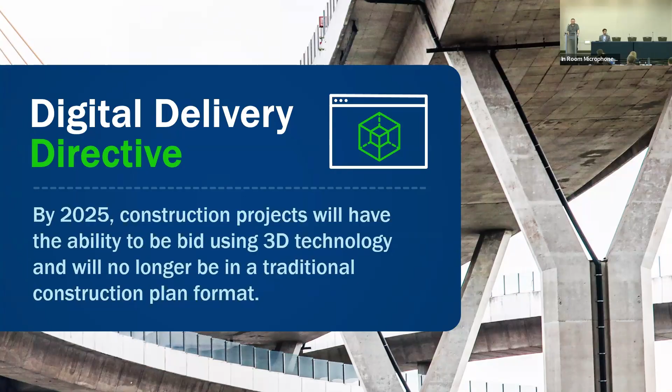So our directive, again, started out with small projects very early on. It wasn't that flip of a switch. So we tried various aspects of digital delivery, a lot of hybrid type projects.

So our first one was where we just modeled the earthwork and pavement structure, eliminating the cross sections. So it was just that introduction of digital delivery to our contractors or our inspectors. So anything they needed off of the cross sections, they had to go to the model. Everything else was still in plan, 2D paper plans.

But as we advanced, we delivered two bridge projects with complete structure models, no plan sheets whatsoever. They were still hybrid though, so on the roadway side there were still paper plans. Then we continued to advance.

The next step was drainage and utilities. So we have projects out there that added the drainage and utility aspect to digital delivery. And then each of our districts was required to have a model as the legal deliverable.

So complete model deliverable projects - we have multiples of those currently. One's advertised, a couple were going out, and we have one in construction. So we are making progress and we continue to advance along.

Now the ADCMS grant opened up, and we were one of the first round recipients of that grant. We felt the need to advance that IFC deliverable, that open data standard, going back to those original goals of the department.

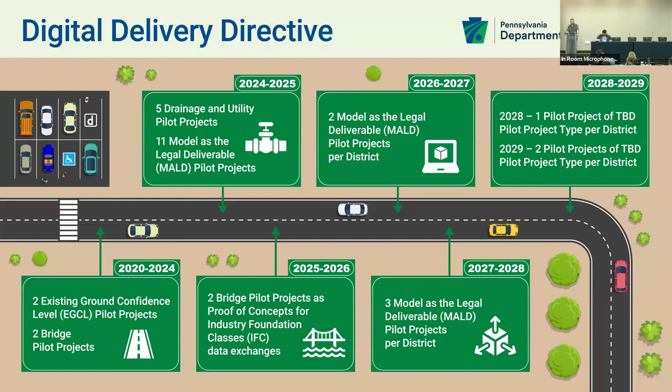So we are starting to institutionalize digital delivery as we continue on, and the open data standards is going to play a big role in that deliverable. Our ADCMS grant was really, again, to improve that data interoperability.

We tested those IFC models - one was for information only, but the other project was contractual, so the contractual documents were the IFC files. It really helps us advance those model projects. These projects are complete model deliverables, delivering that IFC file as contractual for the bridge elements on the steel structure, and for information only on the concrete structure.

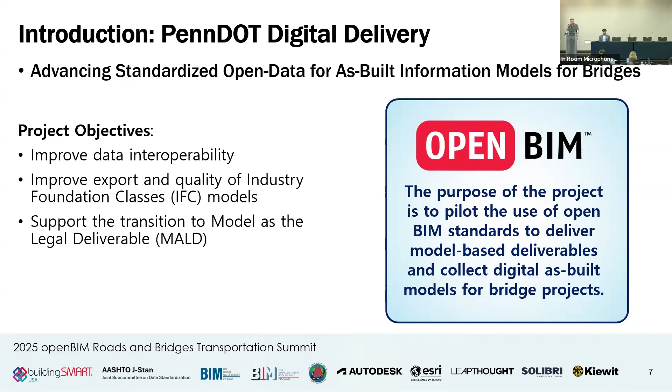But with that, I'm going to turn it over to Joe. Oh, no, I'm not - I still have two more slides.

Sorry. So why is it important that we're actually doing this? Today, we're using our proprietary software, delivering it in that file format, and then the contractor has to take that format and put it into his equipment or utilize it. He's stuck in that ecosystem, that exact product line, to really utilize it without much trouble. So what do we want to achieve?

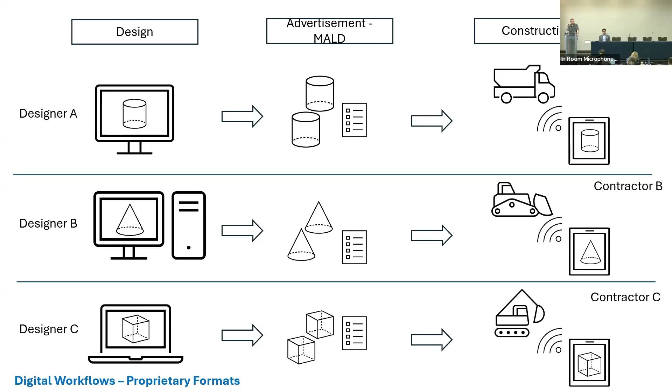We want to be able to achieve where we can design in whatever software. That's the department's goal - we do not want to dictate what software platform our consultants or our contractors have to use, because we want them to utilize what they have developed, what they have invested in and trained their staff in. We want to be open.

So as we go through, this is where we find IFC to be that interchangeable standard - we can design in whatever, provide that as an IFC, and then the contractor can take that IFC file into their equipment. There's not the manipulation like there is in a standardized proprietary file format.

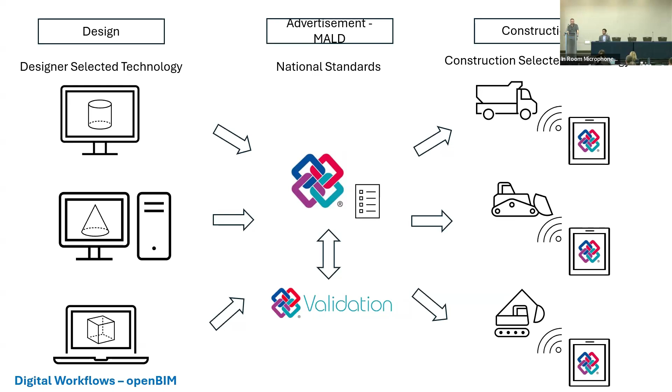So with that, I believe I turn this now over to you, Joe, to get into our pilot project. All right, thanks, Alan. And I know, between the various events that have happened here, probably everybody has heard of this project - even from the sessions yesterday it was mentioned, and you may have even seen some presentations on this before.

So we are going to go through some of the base information, the foundation of how it was built, but we're also going to get into some new updates and some additional content. So if you have seen a presentation on this project before, don't completely check out on me here.

I know we've had a string of events here with IHEEP and everything, but we do have some updates here. First, Alan mentioned the ADCMS and specifically the objectives here. To hit on a couple highlights, the first is we are looking at testing a proof of concept of what the BIM for Bridges Pooled Fund has developed - the IDM, IDS, BSDD, insert your acronym here. That was a key component of this from our perspective.

The other thing I want to mention, and it was said earlier, I think yesterday as well from Will, is just the overall collaboration with the Bridge Pooled Fund, the Iowa ADCMS team, the states, the software vendors. Without that, this could not have happened in the timeline that we had. So I want to make sure I mention that - from our perspective, that was huge in terms of delivering our goals here.

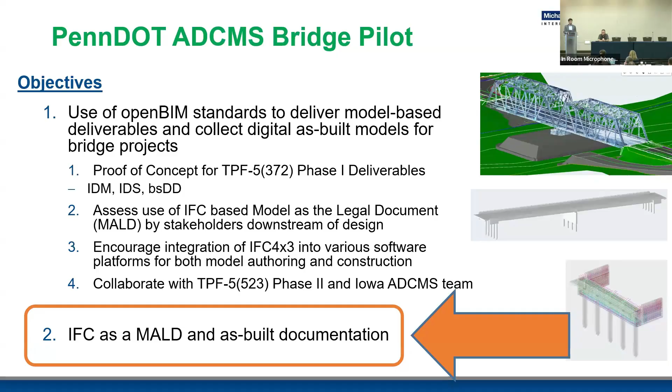Strike that from the record there. I don't know where that came from.

As Alan mentioned, this looks at not only this project but all of the ADCMS projects. They are typical workhorse projects - we're looking for that consistency, not the one-off big cable-stay type structures. Not that that's not beneficial, but we're looking for a repeatable process. I think probably every bridge owner in this building, what we're showing with these projects is these types of bridges make up the bulk of your inventory. So we want to make sure we're on that end of the spectrum.

Also, we want to build on some of what's been done already in terms of openBIM. Going back to even the first BIM pilots, Utah DOT - the first Black Rock project that Utah DOT did, six or seven years ago, we actually provided the IFC files, IFC exports for information only, even back then. That was to work with some of the contractors' software, the fabricators in particular, just to be able to do that interoperability piece. So that's been done.

You can see some examples here on the right-hand side of my screen, where even if the receiving software said it can import native files from other software, we were seeing some discrepancies there, even in the geometry in both cases. The way we solved that was with some IFC exports - the geometry comes through, but we want to build on that approach that's been used for years. Now we're getting into more of the metadata, the non-geometric information properties that are coming through, as well as the structure that we're going to go through here. So we want to build on that.

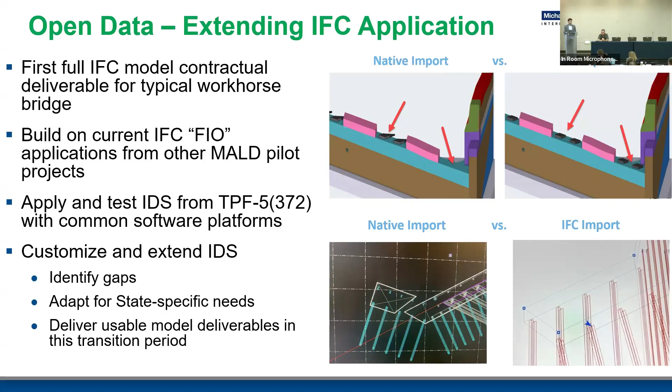I don't want to miss the point here. At the end of the day, this is a real project that we have to deliver—a bridge project that has to be built. So we need to make sure we have a usable deliverable even in this transition period where we're testing. This drove the timeline; we have deadlines we have to hit for the project. We kept it high up in our mind that even in this transition period, what we're producing has to be usable within the field and beyond. So Alan mentioned the two PennDOT projects here.

There's just some images of the actual models. The SR 3010 bridge was a pre-stressed bulb T-beam, single span. Designer was JMT, and that was the IFC for information only project. Then the SR6 project we're going to go over today, that's a 2-span steel plate girder, and Michael Baker was the lead designer there. So again, we're looking at multiple different beam types, but still within our general workhorse type project or bridge framework.

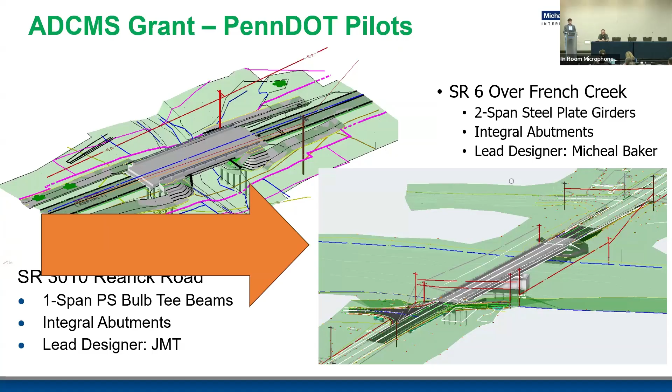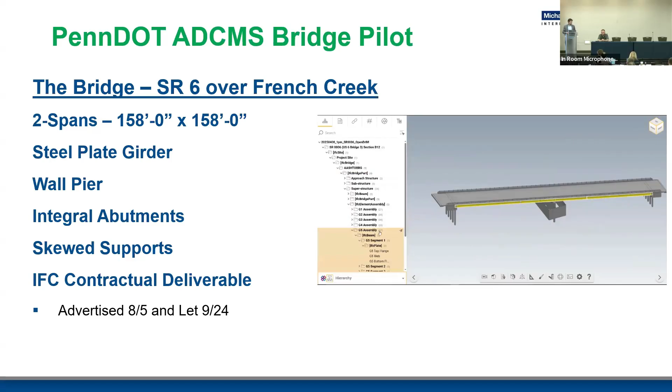Here's a little bit more detail on this particular bridge. As Alan mentioned, this has been advertised and let. As of now in September, a couple months ago, we had that let. We have a contractor on board, had a kickoff meeting, and construction is scheduled to start in the February-March timeframe—physical construction. So we're in this timeframe now where we're preparing and meeting with the contractor, just to give you a bit more information on the timeline.

So specifically on tools—I've learned from doing these presentations that all the questions seem to come in on software. So I thought I'd try to get ahead of that a little bit here. We'll get into more of the different tools we used and why and where we used them. But the point I wanted to make on this screen is that we are also providing 2D details. There are certain things that are more readily available and consumable in a 2D detail format.

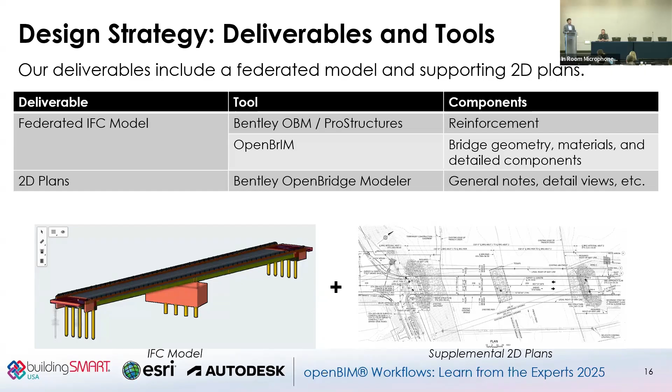We're not trying to cram 3D models down everybody's throat for everything. It's kind of like our 3D models are a hammer and everything's a nail type thing. We want to make sure we're giving information in the most usable format possible to improve and add value to the process. So there are 2D details associated with that, and they are in a digital format—they can still use the same viewers, they don't have to go to a paper PDF plan set or move to different platforms to use it. But there are specific 2D details that supplement our IFC or 3D model in general.

So this is just a brief software diagram here, a process flow if you will. We've tried several different approaches, and I'm sure Grant will get into their approach and pilot project. But what we ended up using was OpenBrIM for what I call our solids—bridge solids. That's all of our abutments, decks, barriers, anything related to the solids of the bridge. And we used Bentley Open Bridge Modeler/Pro Structures for the rebar modeling. We'll get into why we chose those specific tools. But the real key is that all of these come into the IFC deliverables—that's our deliverable for the project. We're using that to test within the IDS and the BSI validation service for use in construction and beyond.

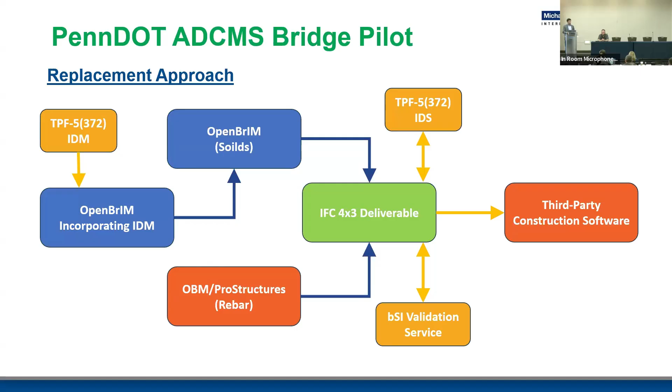So a little bit of overview specifically on the OpenBrIM software tool. As I mentioned, this is for our solids modeling. Some key features here—obviously parametric modeling, that's a key feature in any bridge modeling software nowadays. What really was important for us is they had already built in some of the IFC export capability based on the early releases of the Bridge Pooled Fund IDM and IDS. So they already had that incorporated in their software, which gave us a much better starting point. Collaboration was great, being able to get feature enhancements—the key part with OpenBrIM was their ability to turn around improvements that we needed quickly.

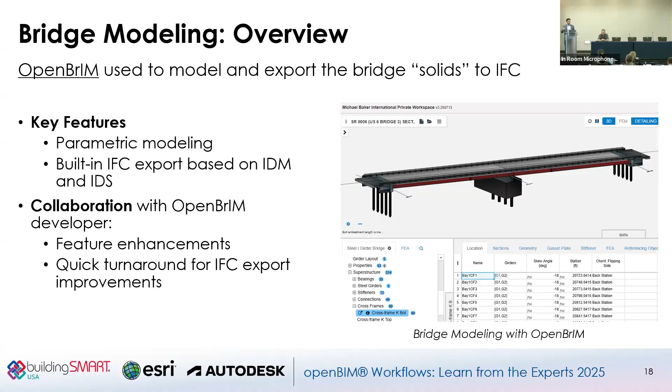I'll go over that here in the next few slides. So here's just an overview video. Hopefully that comes through.

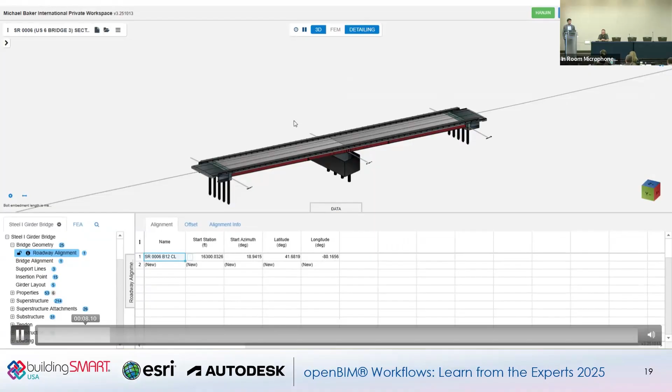This is the OpenBrIM software, our bridge within that software. Again, similar process here with parameters entering in inputs. It's kind of more of a spreadsheet layout, which as a bridge engineer, I like my spreadsheets, so there's familiarity there. But what we're pulling out here is the specific IFC tab that they had developed previously and enhanced during our project, where we got to have some key classifications that were already made and make adjustments there.

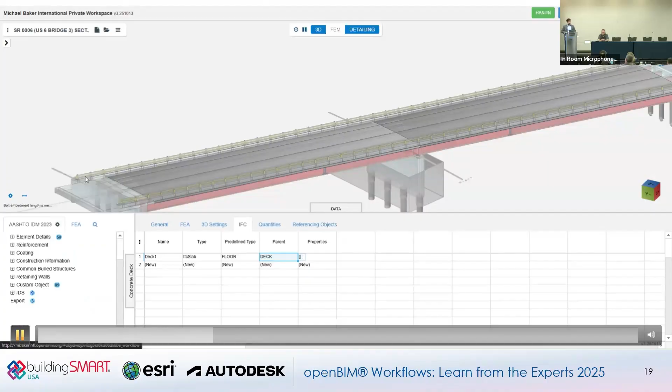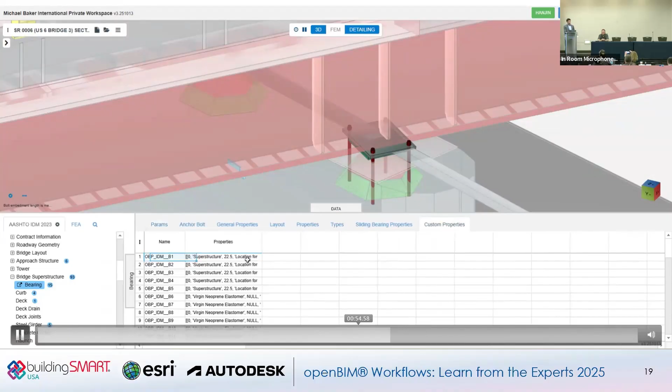In terms of how we were mapping these elements to the IDM and IDS content, it had some of the standards and built-in ways that we could very quickly bring in the IDS content that was there. So we were able to consume that format and check things right within the software before we even exported, to take a look at compliance there, as we were in the native model authoring software, as well as being able to add not only the specific content in terms of property sets from the IDM and IDS, but also custom from PennDOT, like we mentioned before.

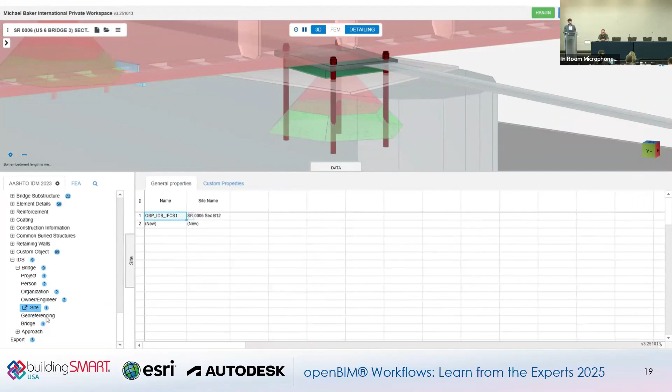So just some further observations here. Again, many may not be familiar with the OpenBrIM tool. The ability to already have incorporated this content within their software, especially the spatial hierarchy. We'll show that here in terms of being able to slide these elements in the right places, if you will, within that structure.

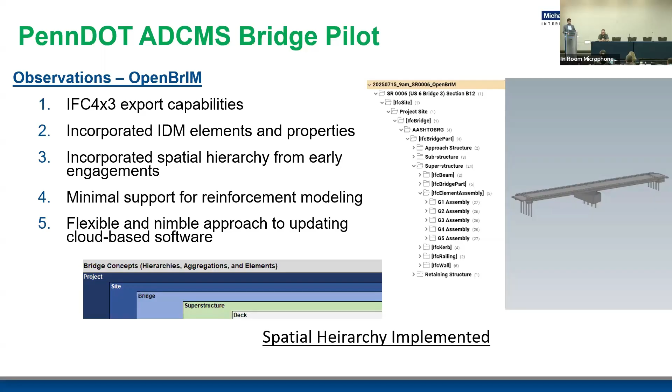They do have minimal reinforcement modeling support, so we'll get into that here in the next few slides. But the key component of them was being able to be flexible and nimble. Many times we had updates we needed from things in the morning, and by that afternoon or the next morning, we had updates pushed from their cloud-based software to make sure that we could meet our deadlines.

And that was really the key component within this, was having what we call a clean IFC 4.3 export. We all know IFC is really just a text-based file, so you can get in and manually modify that, and that can be done. But with the turnaround times that we had between checking, reviewing this content, and hitting our deadlines for the project...

We felt like we needed to have something that we could hit the button and make updates, hit the button again, and have that clean IFC export that we didn't have to take out to a third party and manipulate that text file or within a different software. So that was really key to our success in this project.

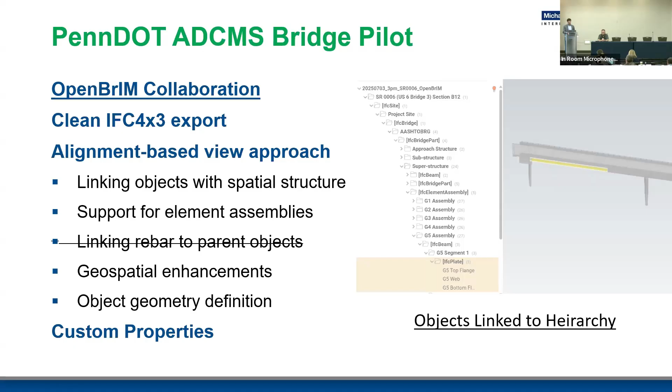And I mentioned the other ones in the previous slides. So I did mention Bentley OBM, and we use that to model and export the rebar components. Again, this was, I guess, where are my bridge people at, and who has modeled rebar before?

Couple, okay, couple in the group, okay. So, and those probably would tell you, I would think, and we'll see some head nods here maybe, but that is not something you want to do in a less mature software, right?

Rebar modeling is a tedious process, even with the best software that we have. So we wanted to make sure we had a mature software that we could model and be able to do that. And again, with OpenBrIM at this point, we wanted to make sure we had that. So we went with OBM.

The other part of that is some of the limitations we had within OBM exports to IFC for some of the bridge elements. They have incorporated rebar in the vertical construction here in IFC exports for probably decades, so rebar is rebar, right? Whether it's a bridge or a building, that content, that background, that structure for that export was already there. So we were able to get a clean IFC export specifically for the reinforcement there with them as well, to keep that going.

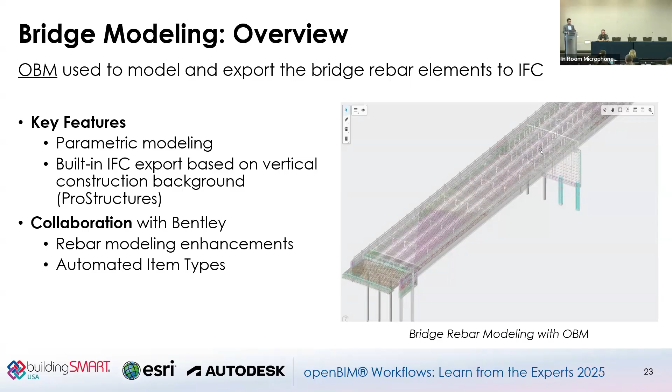So that was being able to use some of that. And again, with PennDOT's work with Bentley and previous engagements for the other BIM pilots, we had already had some rebar modeling enhancements in there to automate some of the item types, bar marks, those types of things within the software. So that's what we used there.

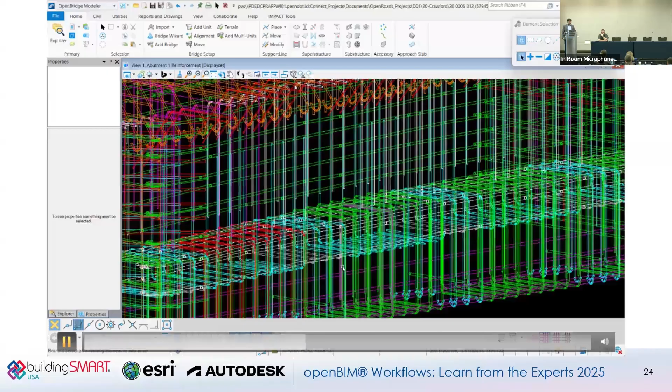So here is just a quick video of our abutment rebar modeling. You can see here, that's pretty congested, we pack a lot of rebar in there. It's amazing that they can get concrete in there sometimes you see that, but just kind of pulling in and looking at one of the specific rebar sets.

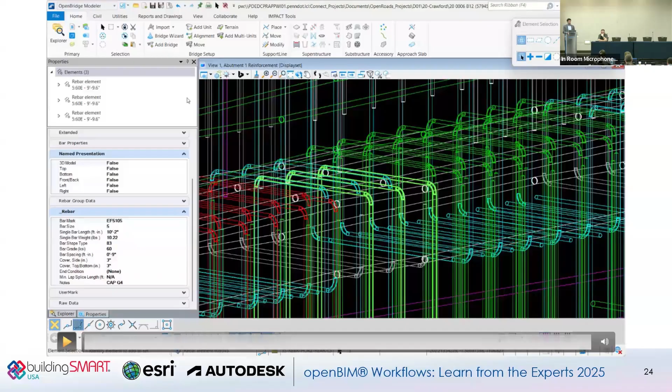Again, as I mentioned here, we have our item types already established for the PennDOT workspace. So we're able to pull that in and automate a lot of that. And then also be able to export that into the IFC file, model export, as well as some of the other ACI and other property sets that come through as well.

So a couple components here, just wanted to get into the actual IFC model structure. One of the key components is the spatial hierarchy. This has been talked about for the last couple of days, but it was key not only for the structure and matching an IDS, but where we saw this really helpful was when we got into adding property sets.

There were certain things we wanted to property set at more of an assembly level, down to a detail component. A great example is our bridge girders, steel girders. We wanted some properties associated with the entire girder line or girder group set, but also properties associated with the girder segment from field splice to field splice, and then even down to the specific plates.

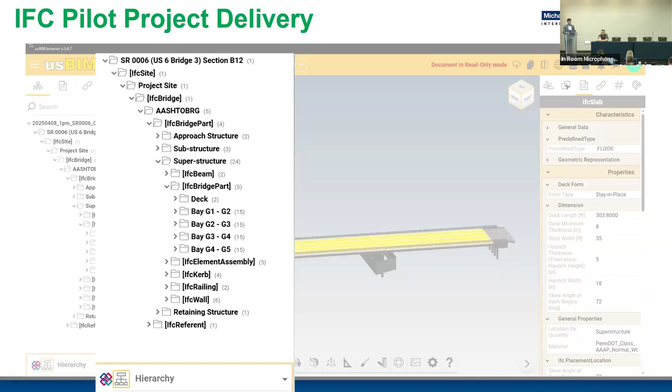Within this structure we can now add properties at those different levels, which was extremely important for us in terms of being able to check that, as well as from early feedback from the fabricator. Those properties are coming through not only our IFC specific properties, but also the custom property sets we developed and wanted to include within the project.

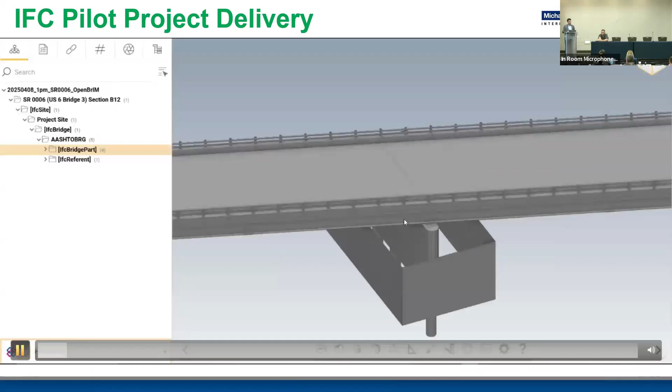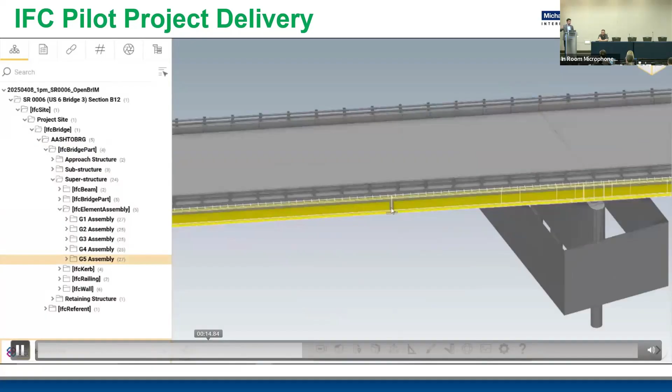Here's just a quick video showing that content, shown in a regular typical free IFC viewer. It shows again that consistent hierarchy - many software do have their own hierarchy, but now we have a way to have a consistent export and a way to get at different assemblies.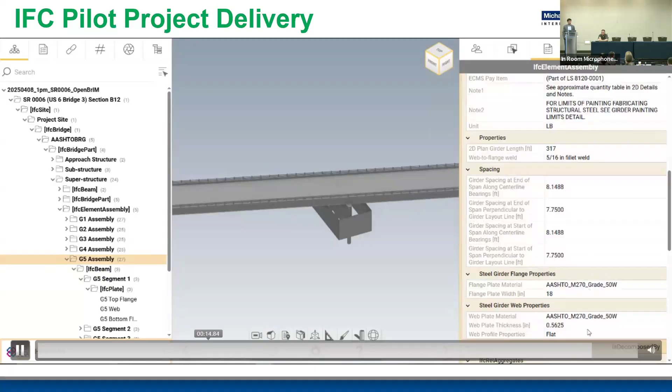There's the total girder line assembly, and now we can get down even to properties there, including some of the camber details, camber ordinates from different phases, that can be built in now to a digital file. This was something the fabricator really liked, so they don't have to get their plan set and start typing in all our camber details for the different situations.

Here's another video - this is the content with the Bridge IFC file export within the Bentley infrastructure cloud environment. This is the software PennDOT is using and providing free to the contractors at this point. It shows not only our Bridge IFC content, but also our roadway environment, approach roadway information, and utilities, all now still within that DGN format.

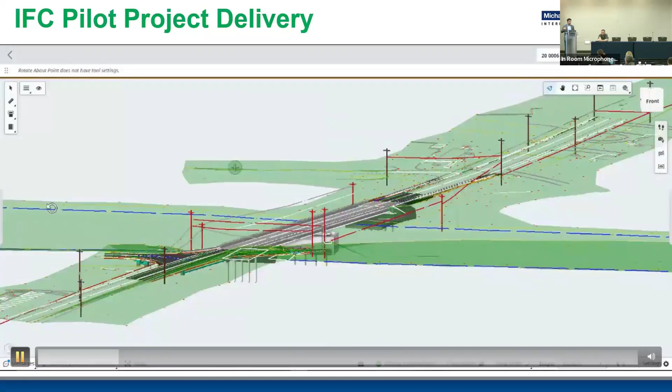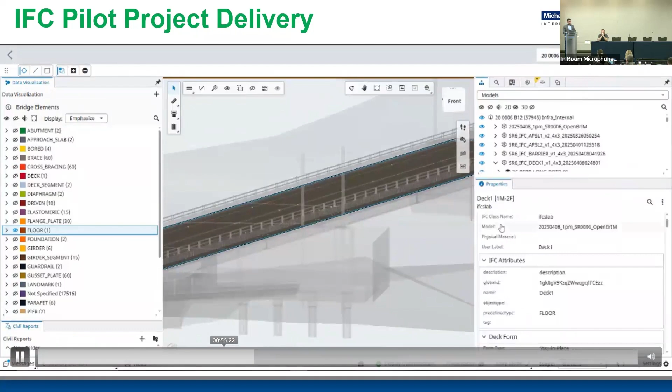So now we're really looking at federating all that information within one environment across all the different disciplines. We can still utilize viewer capability enhancements like Bentley's data visualization and filtering, and be able to isolate different components, including pay items or specific bridge elements.

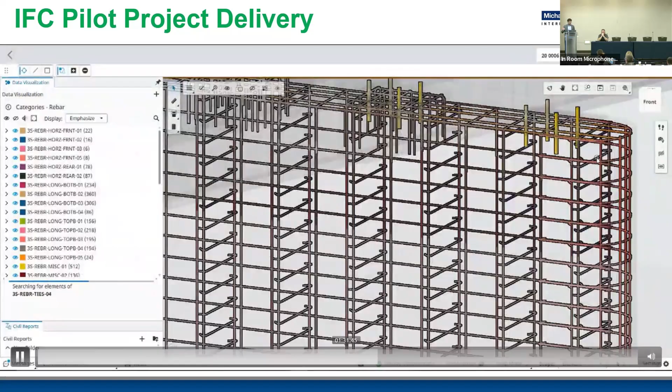Our properties are coming through now. We utilize save views, which is key - I'll get into that a little later - but now we can use that within the viewer property to create save views, which has been really big for contractors, especially those not CAD savvy who'd have to go through a CAD workspace and look at different levels. Now we can turn elements on and off within this environment and save those views so they have easy access, even in the field.

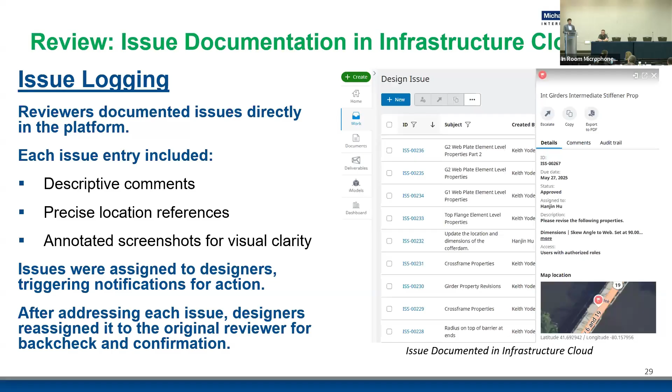So a quick few slides here on model validation and quality control. With the infrastructure cloud program, we're able to utilize issue logging with forms that's been established. So even with a new file format, we can incorporate that and still use these tools that have been established and are now maturing. That was a key component for us, especially with the turnaround times we had - being able to have that content there and utilize these tools was very important.

I mentioned the BSI validation service, getting that clean export we were able to work through - we had a few issues there. This is one of those things we went back and forth with openBIM and the software vendors and got fixed up so that we could get those clean validation reports directly from our exports.

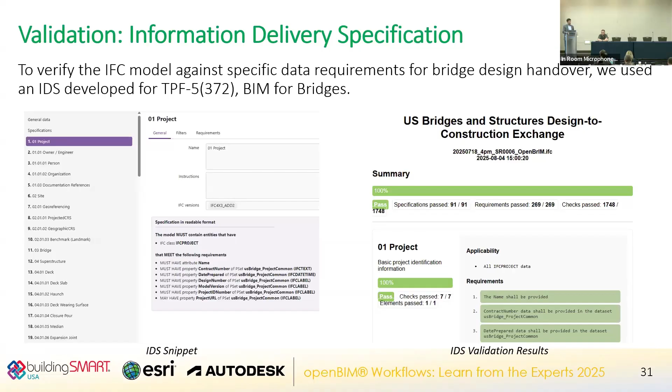IDS, same thing, be able to go through those components and make sure that our files were passing the current version of the IDS content. I know that's being updated and enhanced, but we were able to show that as far as the testing process.

So to wrap up, just a couple of benefits. As we mentioned, as a designer, we were able to use multiple tools, multiple model authoring platforms, and use what we felt was the best tool for the job. I think that's one of the main benefits from openBIM in general - the ability to use that. And again, we were able to show that even though that might not have been the intention when we started out, we were able to do that with some of the needs and test that.

Again, testing, and hopefully, as we talked and worked with Grant and the BIM Pooled Fund for Bridges, we'll be able to validate certain components and look at potential extensions of that from what's being developed there.

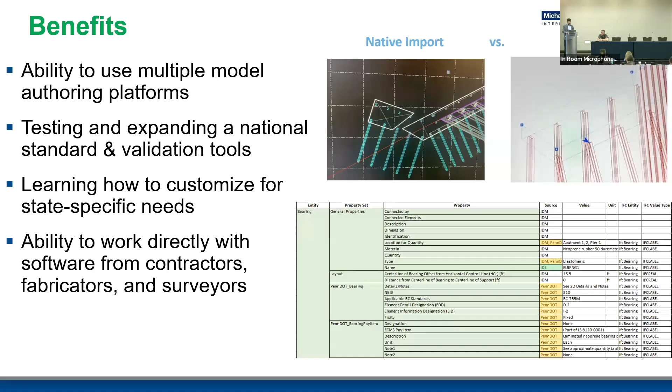Again, with the customization for state specific needs, I think that was important to go through, because every state's going to have work on top of this national standard to add some specific things that they're going to need. And with the ability to work directly with these stakeholder groups to create this project and the timeline that we had, I think that was just a huge benefit through the entire process. And PennDOT has really done a great job leading that throughout their process, not only in this particular project.

So some lessons learned, right?

We're not going to get this right the first time, and I think we already kind of knew that in the back of our head. Some of the things that we did, maybe not even the second or third time - this is going to be an evolving process, and we're going to get better. We're going to look at these different aspects. Every project's a little different. We're going to have different things that we're looking at.

But we also don't have to wait for specific tools to be developed to do this right now with this process. And we don't have to wait just in general for everything to be perfect to get things done. That's one of the things that we definitely felt like we proved through this in order to create a viable product.

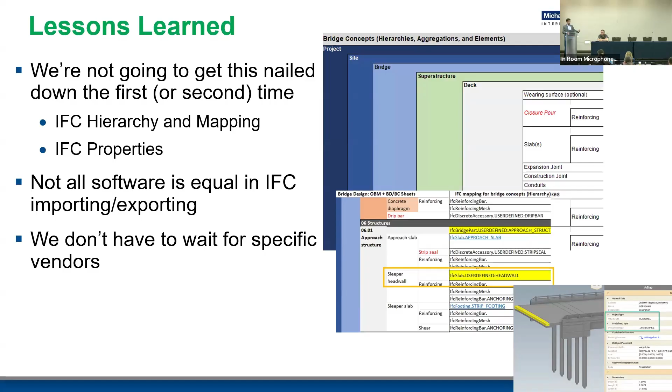One more thing I'll say is there's differences in how software imports and exports IFC files, especially when we get into these later 4.3 type versions of it. So the importance of looking at this early on and getting certain aspects and software vendors on the same page in terms of how we want these to be viewed. Because the IFC is very flexible, there's a lot of different ways you can do the same thing, so we want to get on the same page on how that's used.

So just as a wrap up here, in terms of what I'll call IFC use enhancements - I had 'IFC extensions' but I know that means a lot of different things to different people here.

Just in terms of the use - and this is more, not necessarily within the schema, but maybe again as viewers, and how we can help get on the same page - the top one that we have was the ability to have specific views. Bentley calls them saved views, and we were able to do that within the Bentley software for the files and overall process. But the ability to have that stored within an IFC file so that when contractor A or fabricator B gets this information, they're able to have those same views accessible within the IFC file, not specific to the viewer - I think that's going to be critical moving forward. I have some notes on some things that I think would be extremely helpful, but that has been a key component to being able to use this information.

Especially in the field with non-CAD users. And some other things - I know this can be done, but efficiently and effectively merge or federate different files. Especially when you start talking about contractual models, that's something I think we have to take a look at and maybe get a little bit better at, because we're not going to have that whole big federated model, at least in the meantime, where you hit a button and have everything together - there's going to be different components, different disciplines working on different aspects of that. So just effectively merging those files.

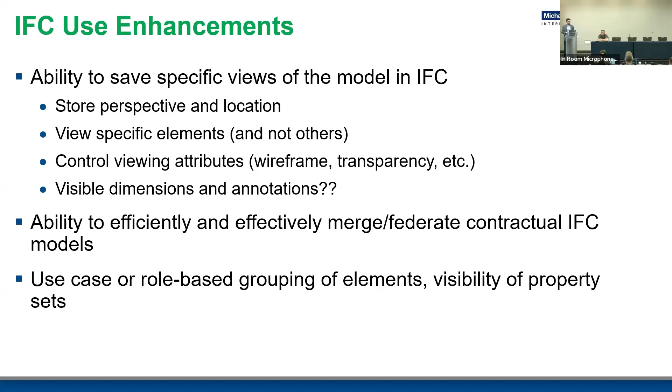And then finally, the ability to have a use case based or role based grouping of elements, hierarchies, being able to see that, and the visibility of property sets. This is one of the specific updates we just made last week talking to the fabricator. They were able to create their own property sets out of that, which is great. We want to be able to do that. But even within, they wanted to look at some specific groupings of elements within the hierarchy a little bit differently than it was set up. That's something I think is an enhancement. They were able to do it in a roundabout, workaround way. But some things to consider as we go through, and I'll keep beating my drum as we find updates and ways we think we can make this process better.

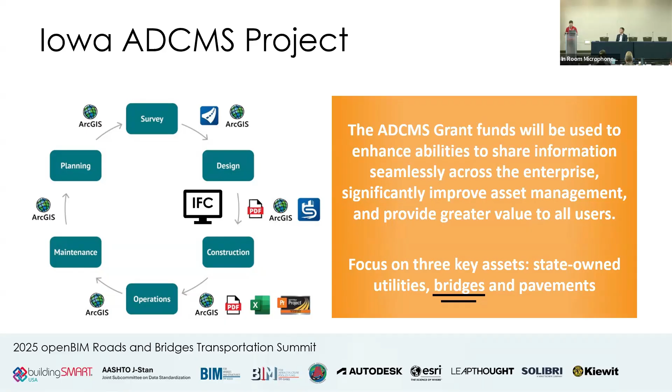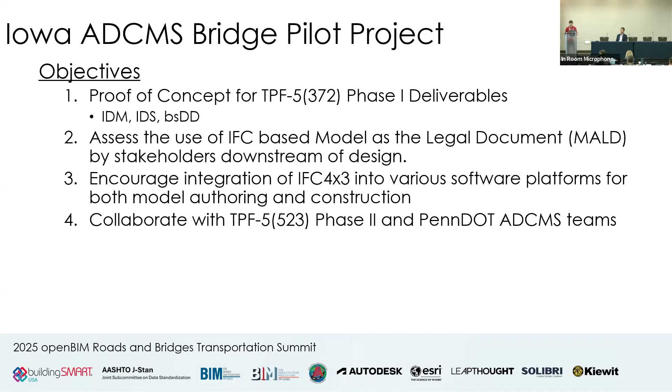With our project, we wanted to do a proof of concept of the phase 1 deliverables from the pooled funds for BRIM for bridges and structures. So testing out the IDM, IDS, Building Smart Data Dictionary, really focusing on what the pooled fund was able to develop - can we put that in action? That was one of the focuses of our project. We wanted to assess how IFC could be utilized to deliver a project. Our intention was to do models as legal documents, like PennDOT, but I'll talk a little later in the presentation about some complications when it comes to doing that in Iowa, at least for a bridge. We wanted to encourage integration of IFC 4.3 into software platforms, and collaborate with PennDOT, the pooled funds, and software vendors to make sure what we're doing is reaching the masses, because it's very important to do these steps. We need these guinea pigs to go out on the edge and say, okay, I'm going to take this leap, figure out what's going on, and share the information. We chose a project that was very simple, similar to the structures from Pennsylvania.

Oftentimes when we've done pilot projects in the past, we get that question: why do you always use the most complicated projects? In 2018, we did another MALD project on a bridge structure, but it was a curved steel beam. Grant was involved in that project, and there were some complications with that.

So lots of things that we learned how not to do pilot projects. So for this project, it was pretty simple. We wanted to avoid any problems with complicated rebar design, complicated beam design, complicated geometry. So zero skew, no aesthetics, no staging, as simple as we can get. There's some downsides to that, because a running joke I have with one of our construction folks is there's 3 different types of bridges we build in Iowa, and all the contractor needs to know is what type of beams, what's the elevations on either end, and then they can just build those bridges.

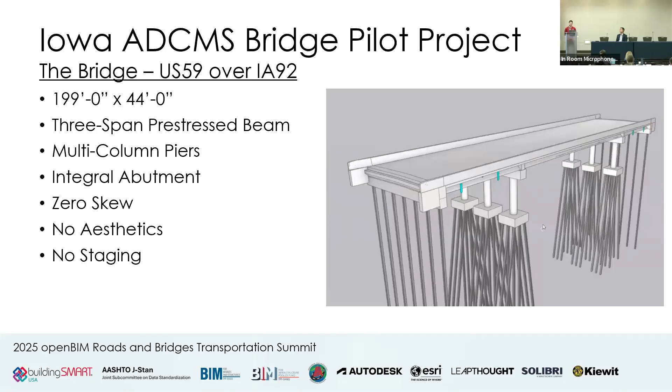That's kind of what this bridge is. It's one of our cookie cutters, but I think that also gives us some advantage because there's not a lot of complexity to it. So we can really give the contractor some time to engage with the model and learn, and give us some feedback so we can figure out what's working, what's not, because IFC isn't going to replace plans overnight.

So the schedule of our project: we kicked off in September 24. September 25, we were advertising the project. We awarded it last month. And now I'm just sending an email this morning to start engaging with the contractor to figure out our pre-construction, where we're going to train them on the model and give them some information.

Oh, internet connection is unstable. Sorry, I got distracted by something shiny on the screen.

And the process is we have our designer on contract to continue to help us with the project as we're going through, and Grant can talk a little bit more about that. So here I'm going to hand it off to Grant to talk a little bit more about the nitty gritty of what he did to make the project work.

All right, thanks, Thomas. Like Thomas said, I'm going to take a few minutes here to dive into the details on the process. Not getting too deep, but trying to stay high enough level that it makes sense for everyone. I'd be happy to talk after with anyone that wants to get a little bit more in the weeds.

I think you're going to see a lot of the same topics or workflows that Joe and Alan presented right before us. I want to reiterate the collaboration between Michael Baker and PennDOT on these projects. It was really helpful, and I think it helped us move forward with a more unified voice, as well as how we communicate with Bentley and other software vendors. So I think that's a really important thing to note there.

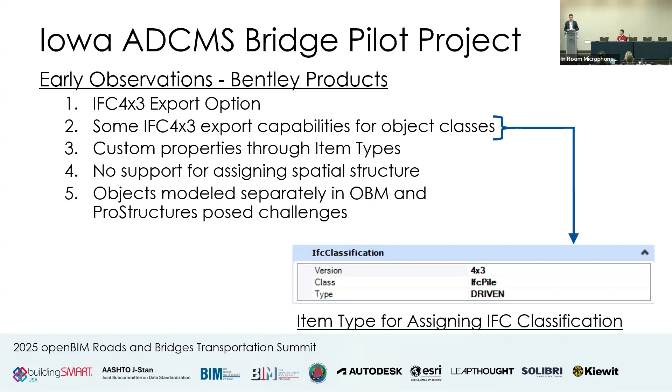Our preliminary approach was to use OpenBridge Modeler from Bentley as well as ProStructures. OBM was for our concrete, ProStructures where we did our rebar and miscellaneous steel, such as our steel diaphragms. We enhanced that with item types. Our hope was that we could work with Bentley to get a clean IFC 4.3 export, get that to process, get all those green checks we want to see from the IDS check, and then get those green checks in the validation service, which you've seen a few times already today. Then roll that forward into third-party construction software, test that out, and make sure we were comfortable with what the IFC file was presenting in those other construction software tools.

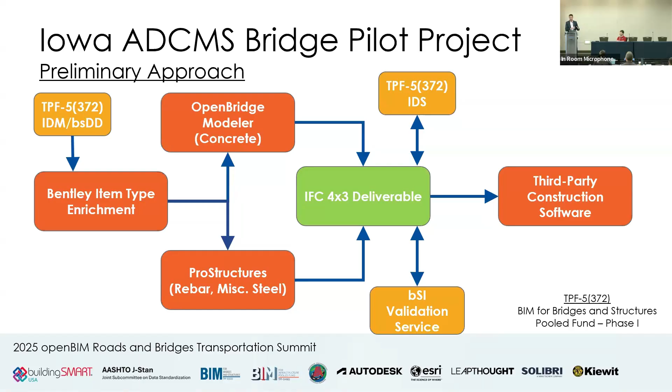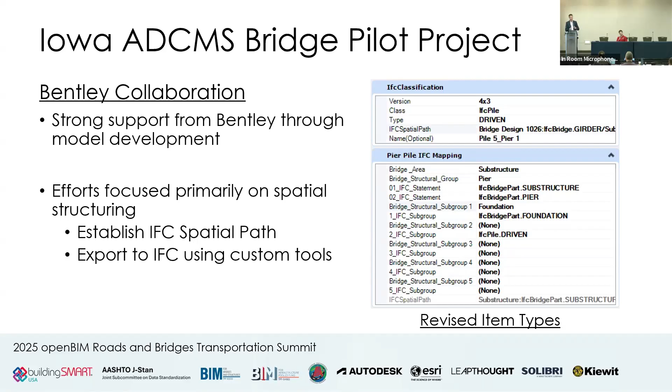I do want to give a shout out. I know Alan's out there somewhere, at least he was yesterday, as well as some of the other folks at Bentley. They were a good partner working over the past 9 months to a year now on this. We had many meetings, monthly or bi-monthly at some point, between the PennDOT project, Iowa DOT project, and Bentley trying to work through some of these issues. Most of our issues focused on developing the spatial structure, and they did develop some custom tools for us to push that out of OBM.

However, there's many enhancements that we still need from the products. It was a long list of things that we needed to implement, and we understand there's challenges, especially with the larger software companies, that it takes time to get these new workflows into their products. So I have a list here of things, at a high level, a mix match of different things that I was thinking of when putting this together, of what we need to do going forward within those products to really support a clean 4.3 export.

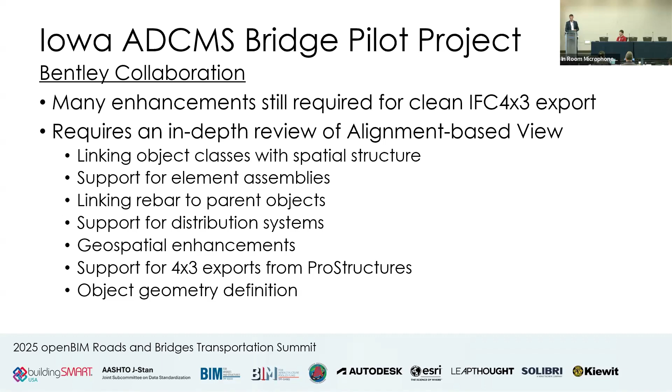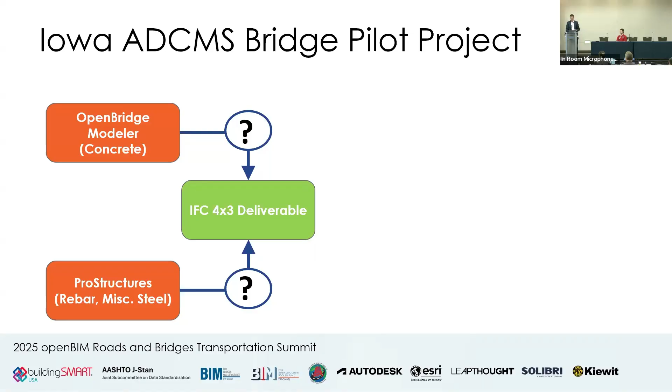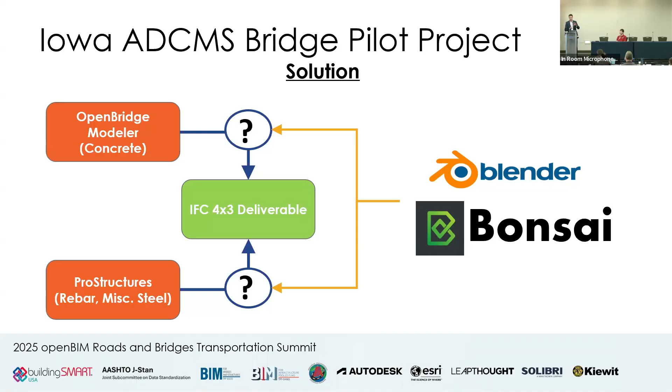Looking back at that preliminary approach, we needed to fill in the gap. We understood that we couldn't get a clean 4.3 file directly from OBM and ProStructures, so we needed to find a way to manipulate those files to get all those green checks that we needed. This is where we really differ from PennDOT: we used a free tool, which is Blender with a Bonsai add-in. If you want to get familiar with IFC, to learn about IFC, I encourage you to download it. It's a little more complicated, but it really gets you to understand IFC and the structure. It's a native IFC authoring tool. There's a lot of power there, and we learned a lot from the tool just exploring the different facets of the user interface. It was a really good experience for us.

Here's just a snapshot of Blender. This is one small part of it, but it highlights the different aspects they present in a really easy to use way for a non-technical person such as myself. They identify the IFC entity that can be modified and changed, give you all the attribute information, and make it easy to adjust the spatial containment as well as the aggregation of elements. So for example, in a cross frame, or like Joe mentioned with the girder example, we may want to aggregate flanges and webs or members of a cross frame into an element assembly. They also allow you to customize properties and a whole lot of other items available within IFC.

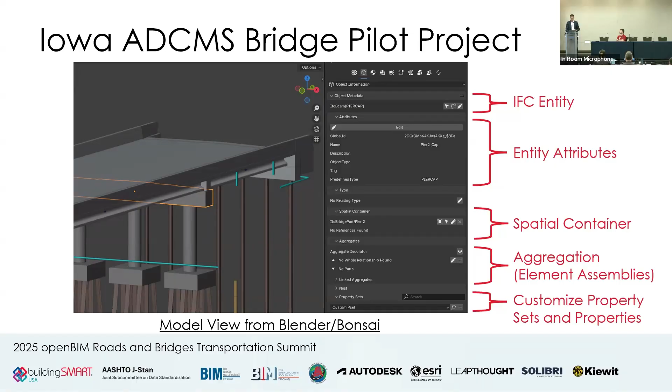Some of the advantages of Blender and Bonsai: there's broad support for IFC 4.3, and it resulted in a clean 4.3 deliverable, again all those green checks. It's free, so especially if you have troubles procuring software, if you're a DOT or agency, hopefully this is easier, maybe not - whether it's free or not, maybe that doesn't matter as much. But lastly, it freed us of vendor implementation schedules. We could make these changes on our timeline, and we didn't need to rely on, in this case, Bentley being able to get it in on time, or other vendors.

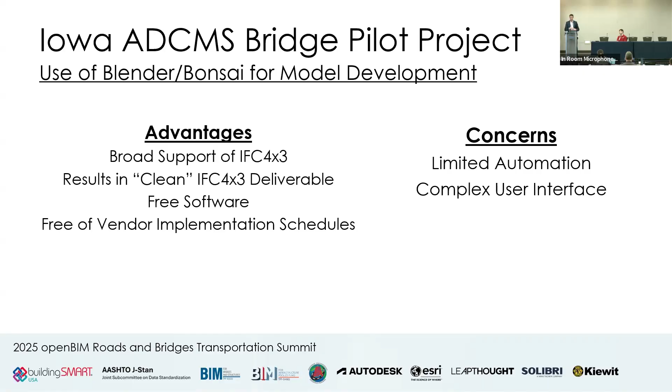Some of the concerns: there's limited automation here to a certain extent, though there's a lot of power, I think, with scripting and other things. I wouldn't say this is a long-term solution, but it's a solution for us to get a good example data set out there for use. And it is a complex user interface if you're new to IFC, but again, I think that really will help elevate your experience and understanding of how IFC is structured and works.

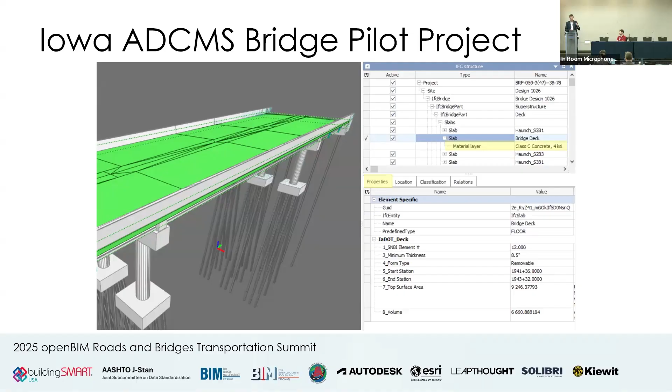I'll end here with a few random screenshots of different platforms. This one is BIM Vision, again showing the spatial structure and some of the attributes and properties involved here.

Some of the software we used during construction or assessed during construction: Trimble Connect, Catenda, Dalux, Propeller, USBIM, BIM Vision. Some of these are paid platforms, some are free, particularly BIM Vision and USBIM.

But we really wanted to understand what the contractor was going to see downstream. We didn't want to just create a clean file and say, here you go, contractor, good luck, and hopefully you can find a platform that reads the IFC in a way that makes sense. So we needed to validate that for ourselves.

There's a lot of good platforms that support 4.3. We settled on Trimble Connect for this particular project, really just because of where they were at with their 4.3 implementation. We felt comfortable with the Trimble name on the construction side, and we felt they integrated a lot of other tools well. So we decided to move forward with that.

Again, we're not mandating the use of Trimble Connect. We're just making a recommendation based on what we've seen and what we've worked through.

A few more screenshots, this one from Trimble Connect. You may have seen this screenshot yesterday or the day before, but there's a lot of power here in being able to dimension objects and save views.

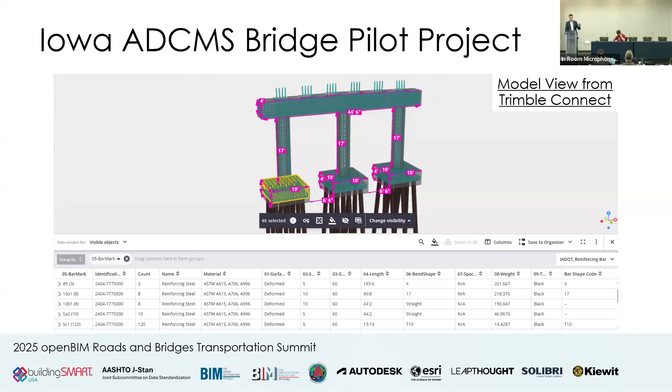I'll reiterate what Joe said - if IFC could capture saved views, that would be a huge improvement, because right now we're locked into a particular platform and need to develop those saved views once we pick a product. So we'll be doing that as part of our construction support. Once we know what the contractor chooses to use, we'll develop a list of saved views for them.

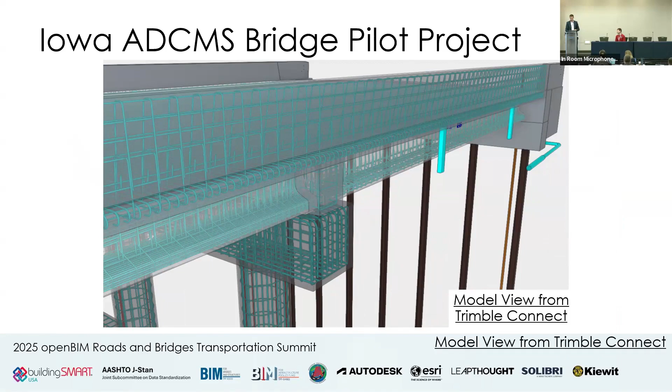To summarize my part: we were able to produce that file with a variety of tools, we passed the validation service, and we love to see those green checks. We want to use this model to improve IFC integration in a variety of software platforms.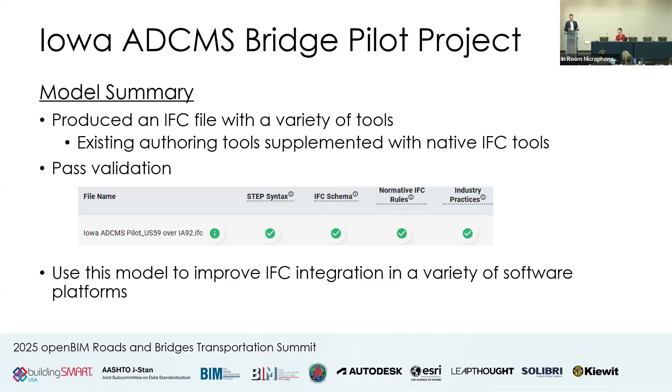So with that, I'll turn it back over to Thomas to talk about the construction side.

Thanks, Grant. So with this project, we realized there's a huge effort when it comes to bridge contractors figuring out how to actually use this. We knew we'd have to engage with our contractors, and that's a huge part. We listened to the AGC and ARTBA talking yesterday about various things they're trying to do to engage their communities, either nationwide or locally, and that's important.

So we started early this year, engaging probably every other month with the AGC to talk about what we needed to do. Our intention, as I said earlier, was to make the models the legal document. We really wanted to focus on that, so the contractor had to engage with the model.

By July of this year, we got to a point where we finally had a model and had the Trimble Connect platform up and running for them. Then came that engagement - we got one contractor who had a real light bulb moment. He came in and said, wow, I can do so much with this, how come you didn't show me this earlier? We'd always been talking conceptually. When they had something in their hands they could use and see, that's where they started to understand what this was really doing for them.

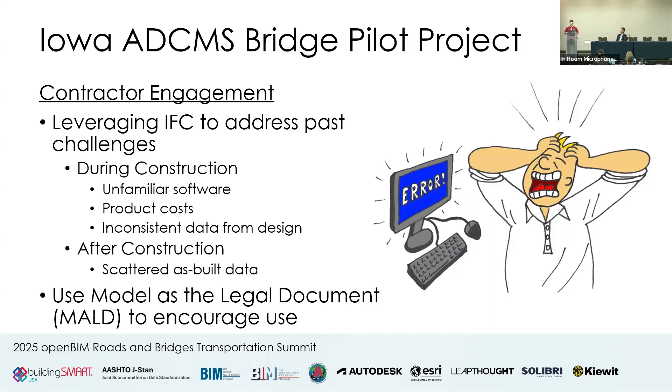So we wanted to be able to have something that could be transferred off to asset management later on. Historically, we've had a lot of resistance in Iowa to going digital, at least on the bridge side. Our bridge folks said something to me early on in this engagement: our guys build with their hands and DeWalt drills. I can't plug a USB drive into that and have an automated thing doing anything.

That really hit home with me, because graders and pavers can plug it into machines, and those machines do the work for the most part. When you've got builders with their hands doing things, it's a lot more difficult to see the advantages.

So we wanted to make sure we engaged with them and get to the point where we weren't giving them unnecessary risk. We didn't want to do that. We wanted to take on the risk. We wanted to be very flexible for being able to do future enhancements. So when we did information only, that's what gave us the ability to basically have a conversation with them, to figure out what we can do.

But there is that disadvantage, like I said, of not requiring them to use it because it's not the contract plan. We have traditional plans with that, and we didn't want to focus on forcing them into something they weren't going to be ready for.

Because, I think I've said this before, when our contractors get grumpy about being forced to do something, they call the governor, and the governor calls our director, and then we get shut down, and that doesn't get anything going on anymore. We don't want to get politics into this. We want to have that engagement.

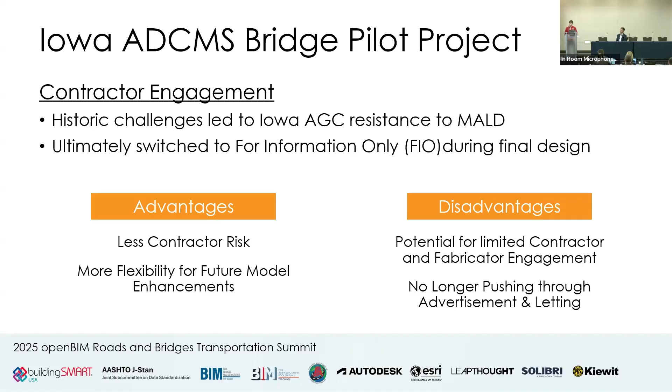So how do we get them to engage? We try to give them a carrot. So we paid them to engage with it. We're starting that process, hopefully later this month, to start meeting with the contractor, engaging, getting in regular meetings with them to say, okay, how can you use this? What do you see that's of value?

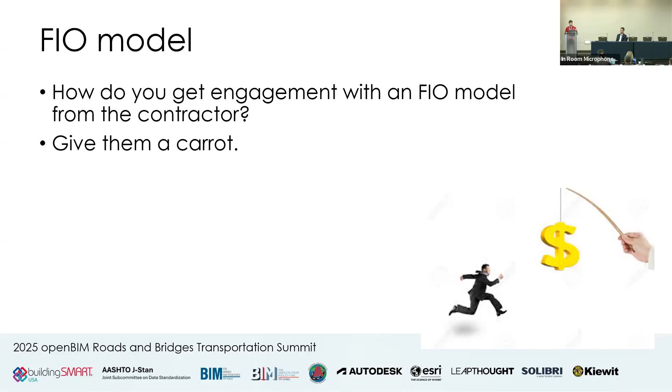We have a contractor that has not done a digital project with us before, so it'll be a good experience working with someone who hasn't had one of our digital projects. It'll be a brand new experience for them, and a brand new experience for us working with a new contractor. We think that giving them that carrot is going to give them information or the ability to engage with us.

We're also trying to see, we've got this model, we want to say, okay, what else can we do? So augmented reality, various things. We wanted to get a field operations set up out there on this project to really try to do more with the model than just say, hey, here it is, it's replacing plans, because that's not going to happen.

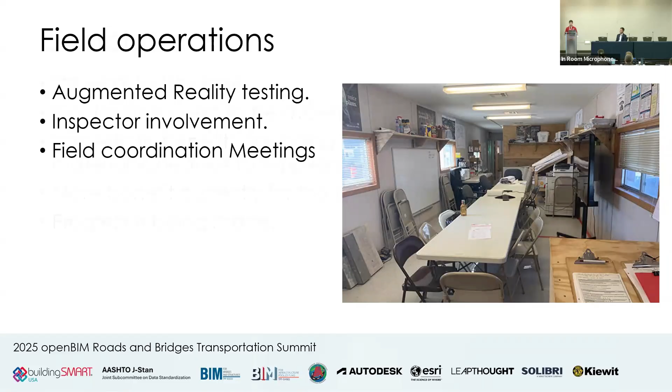So in conclusion, Joe said it beautifully. We've got to have those things that replace paper. There are major issues when it comes to building things. There's grease, there's dirt, there's rain, there's mud. There are so many complications.

There's data problems too. A piece of paper doesn't have its battery die. A piece of paper, if it drops in a puddle, you can print a new one for 5 cents. You drop an iPad or a $5,000 data collector down in a river, that's a big problem. You don't want to have those situations going on.

So I don't know if paper will ever 100% go away, because there are certain things it's very good at. That being said, there is still progress being made. As I said, the contractors, when they're shown and given something to use, that is when the proof is in the pudding. I think they're finally seeing there's some value to it.

Some discussions I've had throughout the week: when the contractors see that they can make money on this, that's when they're going to embrace it. And if they can find the efficiencies, like I said, making money, they're going to want to utilize this as much as possible. I think that as designers, we don't know what we don't know.

I'm not a contractor. I've never built a bridge in my life. I've been in the office most of my career, never really been in the field. So I think having that feedback from those people that are actually doing those things is going to be very important to this process of trying to figure it out.

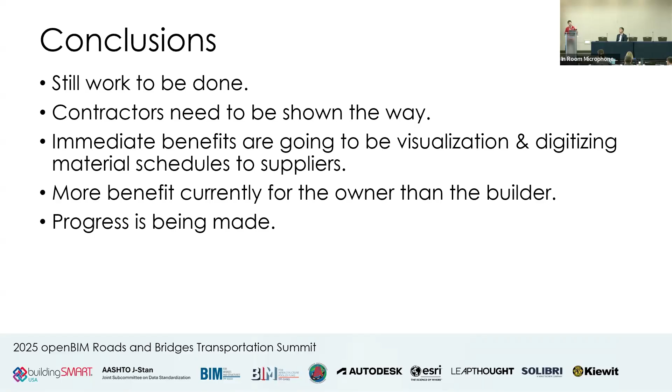And I think that's very important to deliver these back to the vendors. I think we're going to see from several vendors today what they can do with these models. And then we have to keep engaging with the authoring software vendors as well to figure out how we can get these solutions out of the product natively, without having to go through the process Grant did with a lot of post-processing with Blender and Bonsai. So there's work to be done, but we're on the path, we're on the right direction. We've proven that you can deliver these, you can make deliverables from these projects, deliver information digitally to give value and meaning to the field. So with that, I don't know if we're ahead of time or behind time, but that is what we had. Thanks. All right, thanks, Thomas and Grant.

And Grant, we have you scheduled for the next one also. So Grant's going to be talking about openBIM pilot project key takeaways. And when he finishes, we'll have the presenters come back to the front and we'll go through some Q&A.

All right, thank you. So yeah, I'll take the next few minutes to try to capture what you've heard, not only in the last two presentations, but really what you've probably heard over the last day or two, depending on how long you've been here. Now this is my perspective, my key takeaways. Joe, Alan, Thomas, you may have different takeaways, but I think we all can agree on most of these, and maybe we can discuss afterwards if you don't. So I apologize, I'm not a great producer of content for PowerPoints.

I should have put this in AI, but I'm just going to throw it all out there. My 8 key takeaways - that last one, I just don't like odd numbers, so I needed an 8th. So it's 8. But I'll walk through each one and hopefully provide a little bit more information.

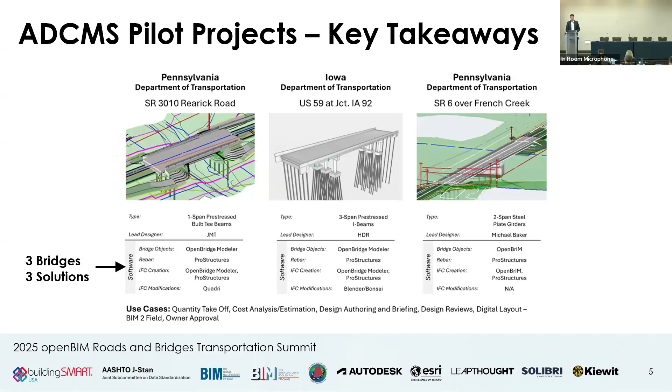Next is IFC standards provide new opportunities for technology providers. I think, and again this is my opinion, it feels like open standards are opening the door in many ways to try to solve problems that maybe software vendors haven't had the time to address. So there's some opportunity not only for the larger vendors, but smaller vendors to really get in there and try to solve these problems.

So hopefully we see an acceleration of development as these open standards are produced. I think also there's a huge advantage to the users of software. I think Will Holmes, wherever he is, said it yesterday, that innovation or competition drives innovation. And this is something we've seen even over the course of the pilots - we've seen a lot of new technology providers really hungry to get into this field and provide solutions for us. And so I think there's opportunities on both sides, the technology providers and the consumers of that technology.

Next, we have software vendors need and want additional technical guidance. This is clear to us. Let me go to the next slide. Through this process, there's a lot of technical questions that still arise as we work through this. And this is not to say that this is not ready for implementation, but what I'm trying to get at is we need to provide clarification where it's needed to ensure consistent implementation across the different software platforms.

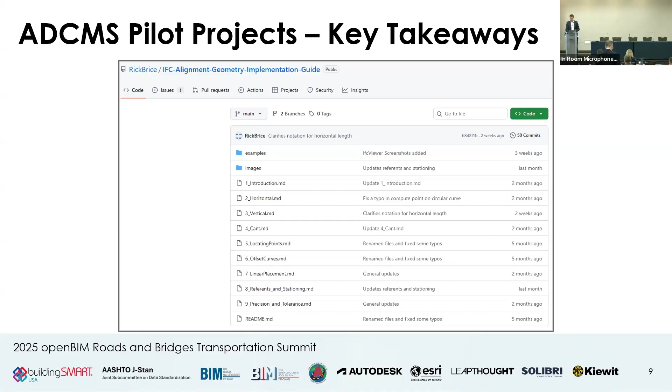One example of what I would consider good documentation is what Rick has developed - shout out to Rick Brice from Washington State DOT. He's created an implementation guide on his own, and it's really detailed, getting into alignment and some of the alignment data. So if you have not seen this, I encourage you to get into it. It's really almost above my head in many of these chapters, but hopefully it can help with the consistency part of implementation. So again, thank you, Rick, for your time and putting this together.

Next, pilot projects encourage software implementation.

Implementation can be challenging. I'm not a software vendor, and I don't claim to be an expert in IFC, although I'm starting to find my way around. Especially for the more established software vendors, it's challenging. They've established these workflows that we've asked them to provide solutions for many years, and now we're asking them to fit in open data standards. So we need to be somewhat patient while still trying to push implementation of open data standards. We recognize that, and I want to make that clear.

Pilot projects provide real sample data sets for them to target. I think this will help them move in a direction quicker, if we can say and be clear about the final product of what we want, and let them do what they do and find a solution on how to get from point A to point B.

They help identify unforeseen challenges as well. We're not working through idealized solutions. Going through pilot projects will help us identify those challenges.

And lastly, it shows commitment. Pilot projects actually having something tangible that DOTs are putting out there is really important. Like I said, it's a big investment, I'm sure, for software vendors, and to actually show that we're doing stuff rather than speaking to it and putting on slideshows is, I got to imagine, encouraging for them.

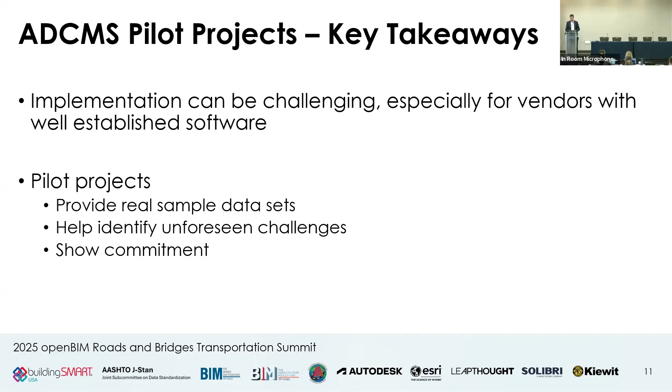Pilot projects elevate technical expertise, and this one's probably one of the more important for myself personally. It gives opportunities not only for bridge engineers, but any design engineers or any non-technical folks to really elevate the understanding of IFC and collaborate better with technical experts.

I think this was a gap that we recognized, speaking to the pooled fund in phase 1 of the BIM for Bridges side—we had our technical experts and our engineers, and it's just really hard to communicate when you don't have a high level understanding of what the others do.

So this was again big for me, and I think this is really going to show itself in the phase 2 updates that we're doing to some of these deliverables. It also results in improved data organization and presentation, higher quality reviews.

Spreadsheets—Julie showed spreadsheets that were produced and she got excited, and I'm excited about those spreadsheets. I know this isn't probably the venue that people get excited about spreadsheets for, but for us, it's something that we're used to and we can see and we can review, and hopefully as DOTs and agencies, it's something that you can make sense of and provide valuable feedback to us.

And we can have better, more informed conversations with software developers as our understanding of IFC is elevated. We're almost done, I promise.